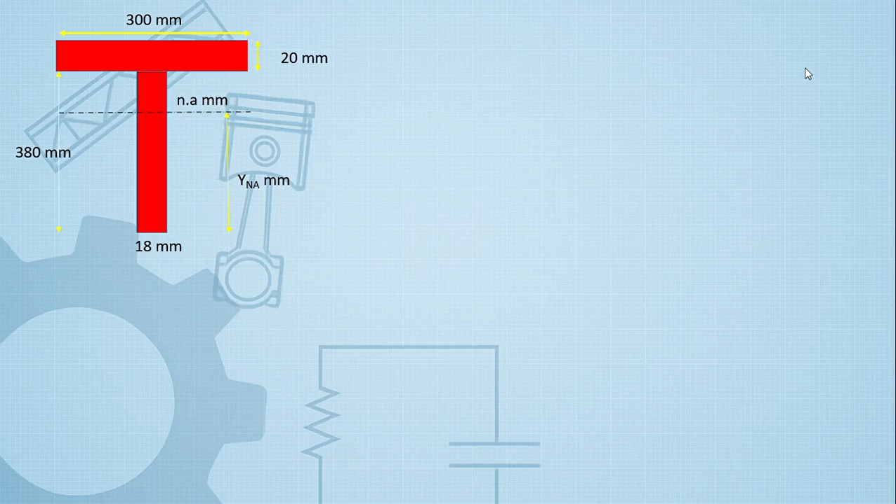So, ang dimension niya is 300. Ang flange niya, thickness ng flange is 20 mm. And width of the web is 18 mm. 380 mm yung depth ng web. Okay. So, the conventional way is hatiin nyo siya sa dalawang area. Yung area 1, area 2, yung rectangle sa taas, yung rectangle sa baba.

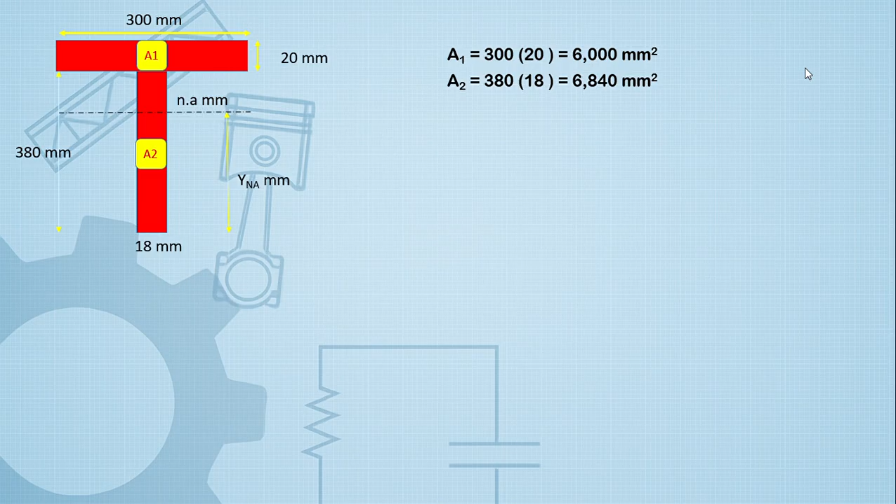Okay. So, you compute area. 300 by 20 is 6,000. Area 2 is 6,840 mm squared. So, ang total area niya is 12,840 mm squared. So, using Varignon's theorem, makukuha natin itong y-bar. Y-bar.

So, yung y-bar, ito yun. Makukuha na natin itong y-bar by Varignon's theorem. Area total times y-bar is equal to A1 y1. Ang y1, ito yun. Itong yung centroid ng each na area, okay, with respect to the y-axis, no?

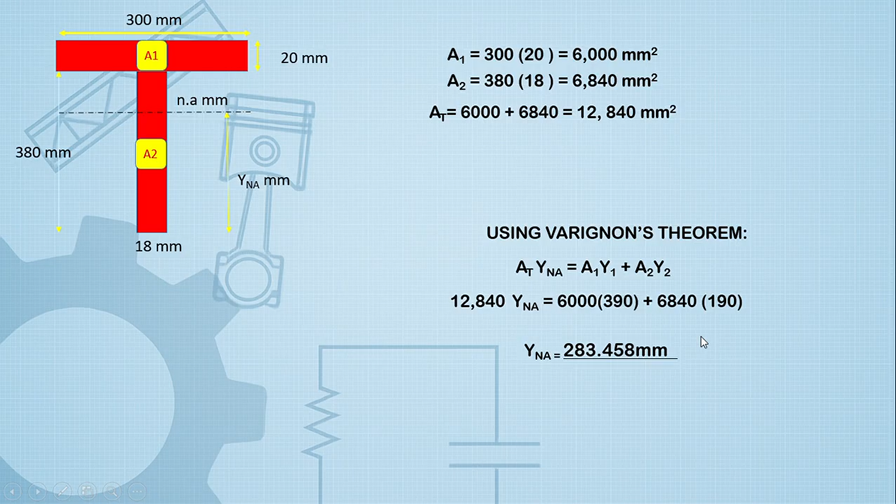So the total area, 12,840, is equal to 6,000, yung area 1, okay, times 390, kasi 380 hanggang dito sa kalahati ng A1, no? Plus 6,840 times yung kalahati ng 380, yung area 2, no? From the bottom siya. So ang y-bar is 283.458 mm. Okay? Using parallel axis theorem, makukuha na natin yung moment of inertia, no?

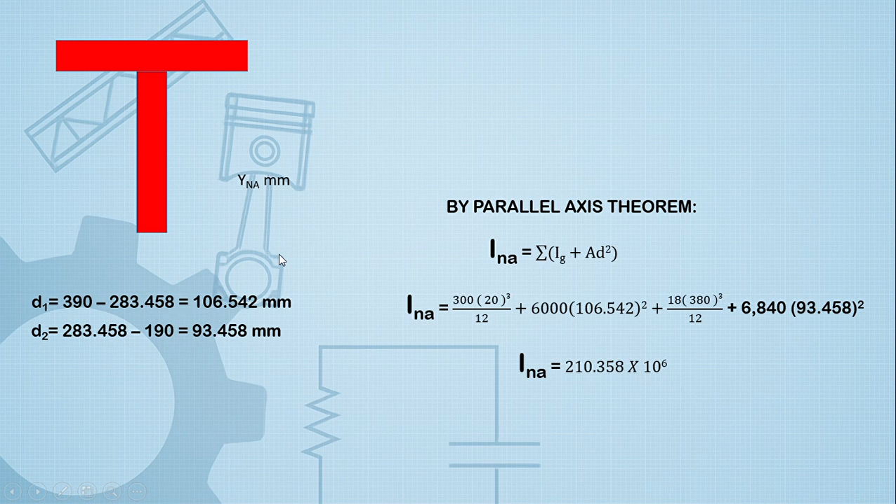Kasi ganoon lang kasimple. Yung D1, explain ko lang. Okay? Ang D1 is yung y1 minus y-bar; ang moment of inertia nandito yan. Wait lang. Okay. How do we... Okay, area 2. Okay. We will use a pen. We'll use a laser point pen.

Ito yan. Yung D1, ito yon. Kasi nasa area 1, 390 minus, ito yung 390. 390 minus yung centroid ito. So, nandito yan. Okay, ito yung D1. Ayan dito is yung kalahati ng 380, minus 283. No? So, nandito siya sa baba. Okay, D2.

Parallel axis theorem, summation of IG plus AD squared. So, ang moment of inertia ng rectangle is BH cubed over 12. So, BH cubed, B is 300 times 20, ito yung height, cubed over 12. Okay. So, ang answer is 210.358 times 10 raised to 6, or 210 million. Okay? So, ito yung conventional way.

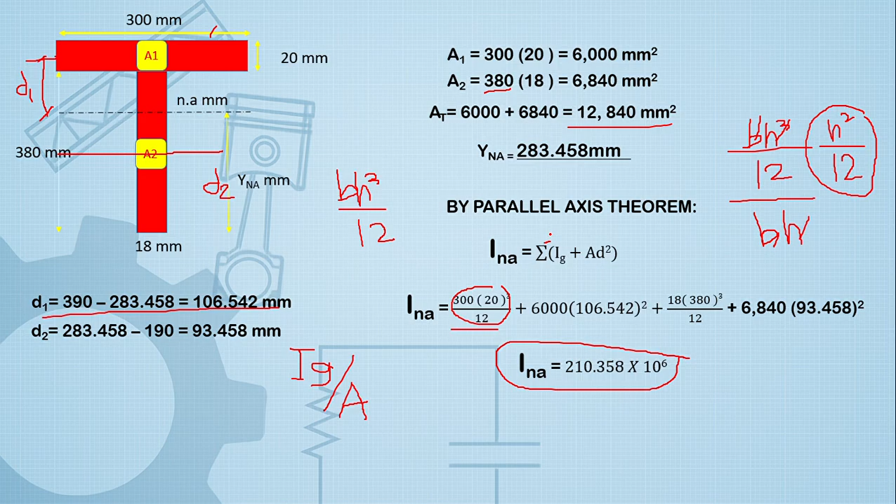So, ang answer niya is 210.358. Tama. Kasi ito, 210 million. Tama. So, calc tech lang ang pwede pag board exam. Kasi minsan nalilito sa conventional way sa pagkuha ng D. Pero, mas mainam pa din na gamitin nyo rin ito para makuha yung concept. Pang double checking na lang itong calc, no?